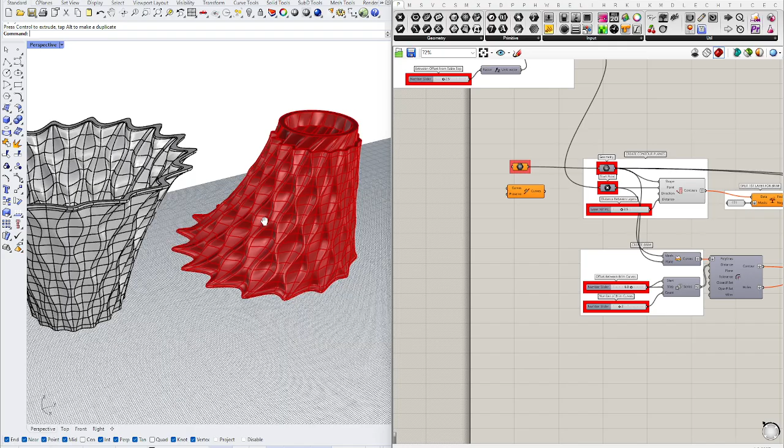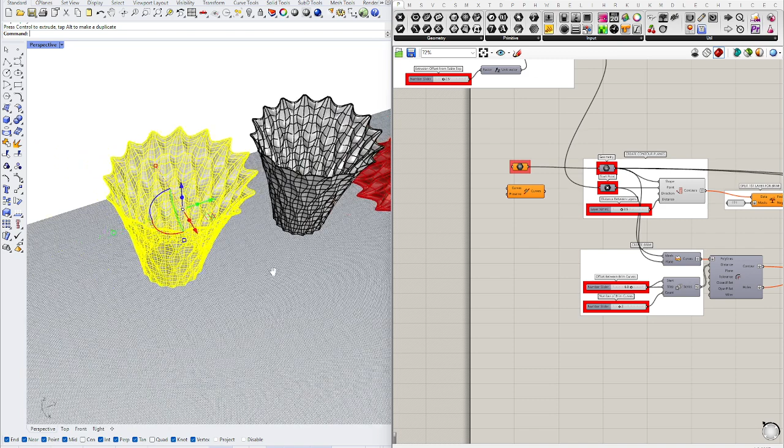So let's just start by setting up the mesh like we did before, since the file broke down just now. We remove it so that we just have one surface, and we can use write mesh to turn it into a mesh. We can go for fewer polygons most likely.

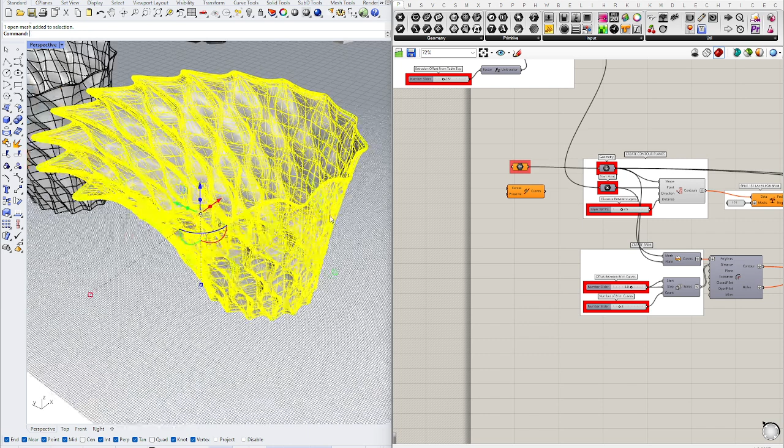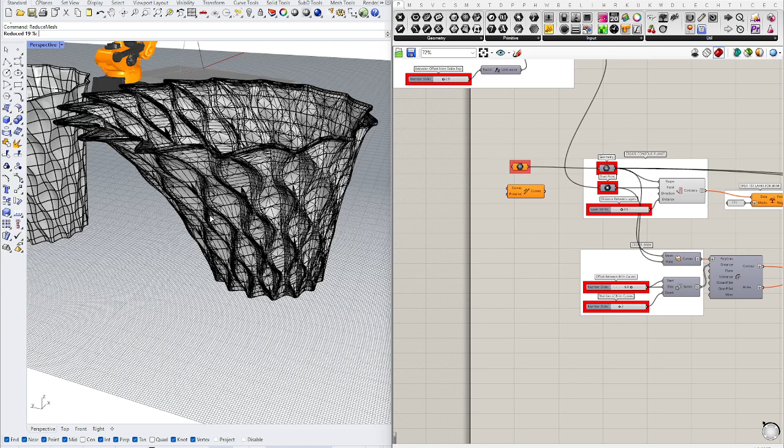And if we simplify the mesh, we have to re-simplify it, so we use reduce mesh. What we're printing now is a mesh that isn't reduced, but just by looking, I think we can go down to around 10,000 and still more or less keep all the features of the model without losing detail. It's a compromise between speed and whatnot, but in general it doesn't make that big of a difference.

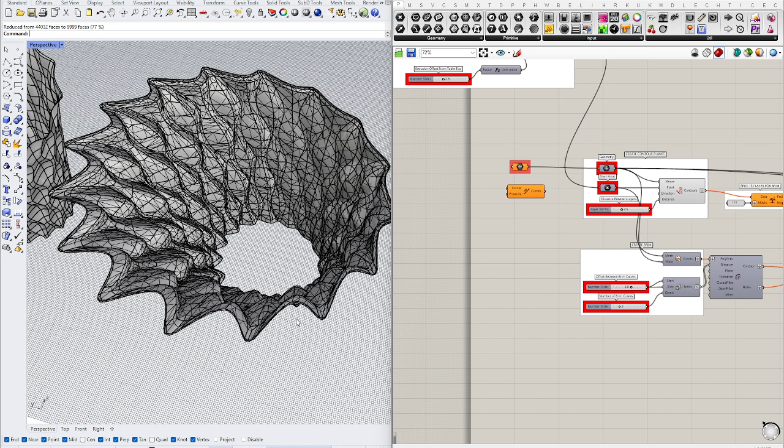It's good to reduce it just in case, and as long as it's not like millions upon millions, or maybe several hundred thousand perhaps, then it should be fine.

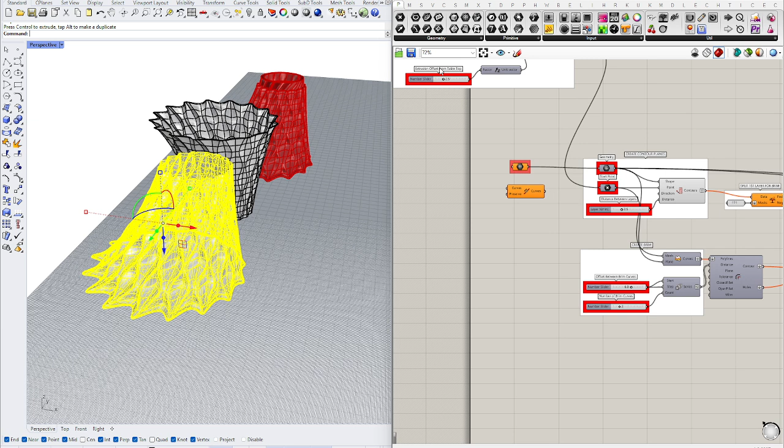We talked about this before, but obviously this one is too big. So when printing it later, we're gonna have to make it smaller or something, or divide it up. Right now I do 0.5.

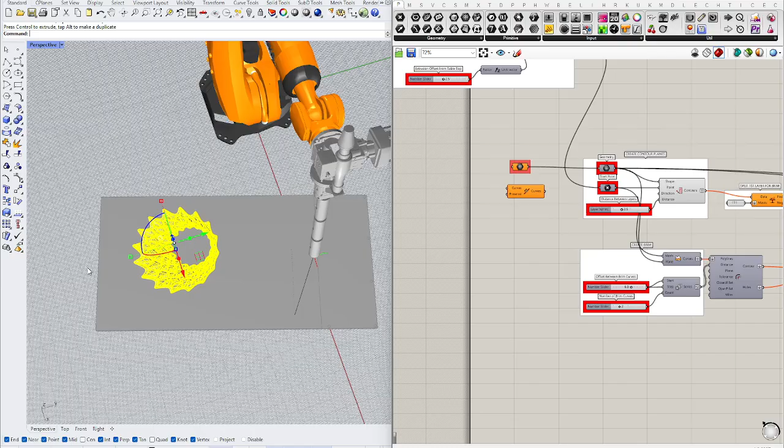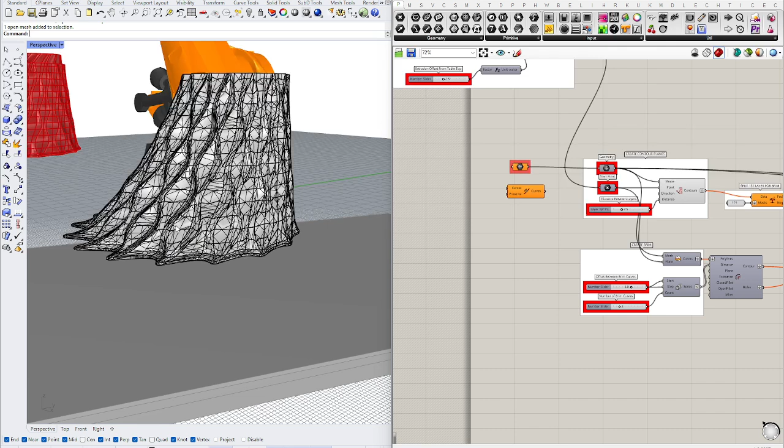And we can also consider that if we have it on the bottom, as we did now, it's a little bit easier to add more supports down here. But if we need to add supports up here, then it becomes a bit more complicated. It's still possible, but then you have to use, for instance, create surfaces up here and then use the base geometry to kind of split it or something.

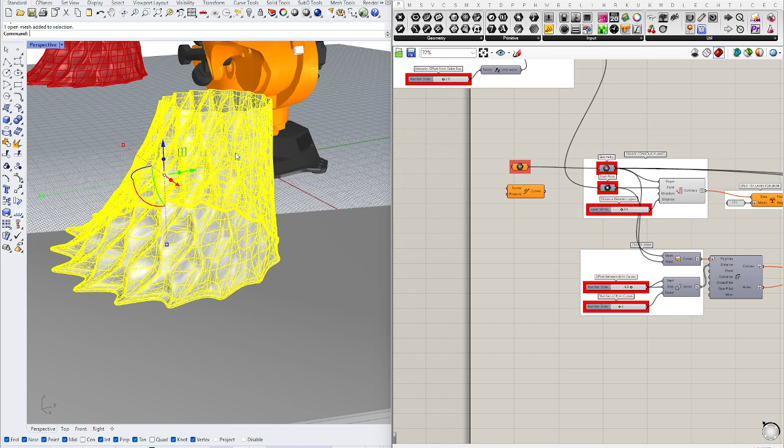It's a bit annoying. And the thing with supports in general is that if you do manual supports, you probably want to do them pretty tightly, because its ability to do overhangs is pretty bad in general. Also, if you have intersecting geometries, you're probably gonna get like a smudge line, where all the materials get compressed over.

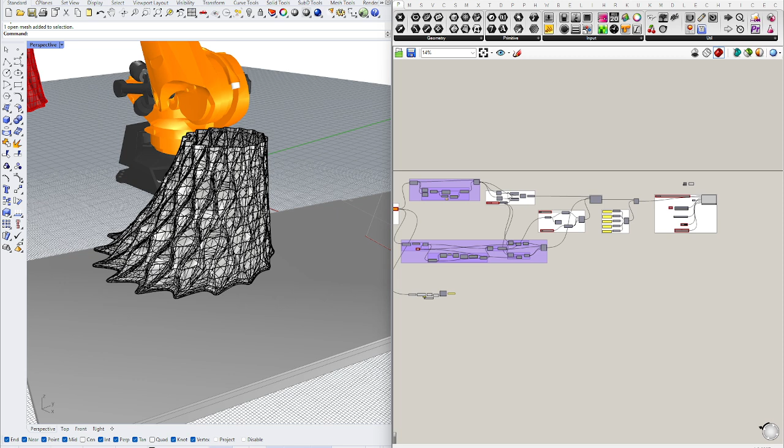Either way, once you're in here, you can open up the script. In this furthest end here of the script, you can find the printing bed, so you can bake it if you want something to be able to snap the model to.

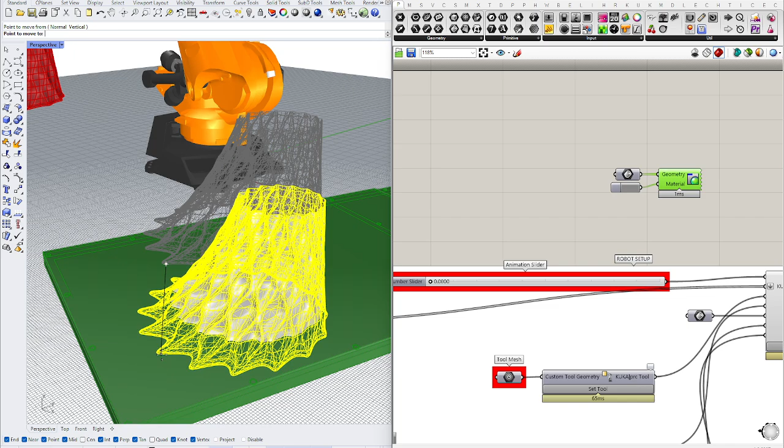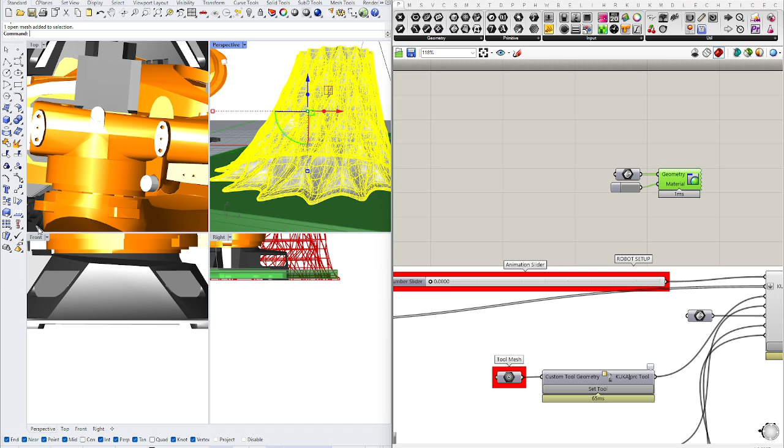So I tend to lock this, and it's usually better for the print not to be totally flat against the ground, so you can just move it up like 2 millimeters. It can be worth double checking that the model is for sure truly planar. As you can see here, since we did reduce mesh, it's a little bit jaggedy now at the bottom, and that can actually at times create issues.

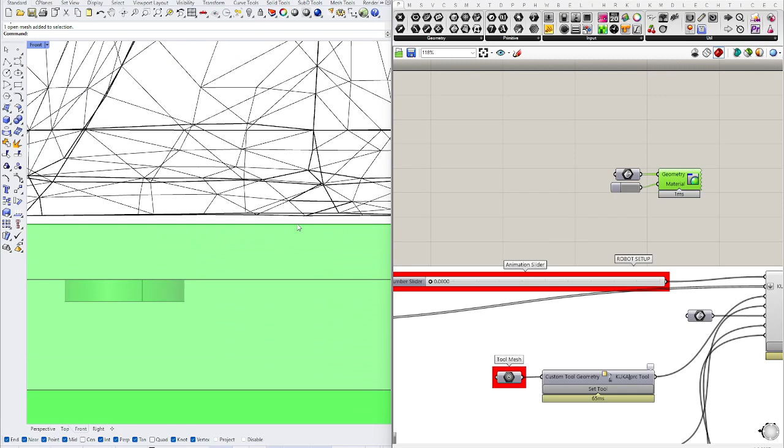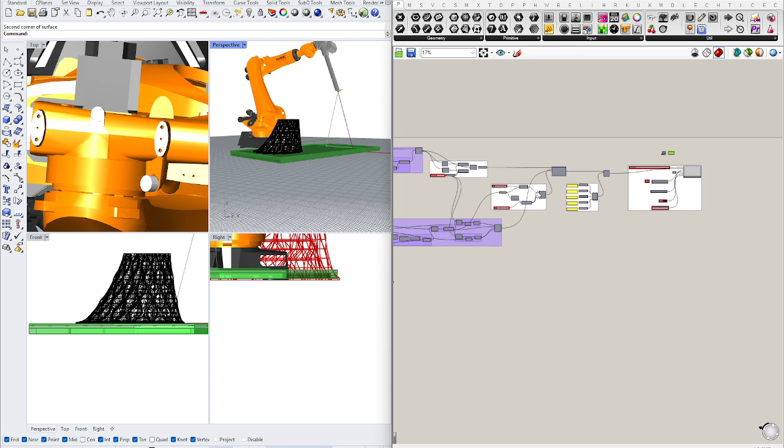An easy fix would basically be to just add a surface and maybe move it up 3 millimeters or something, and then cut it and move it down a millimeter or something. Let's just try this one and put it in.

So just basic things, it's the script. It's in Grasshopper, obviously, and the only parts that you need to really know about is how to put your mesh into the script.

So it's basically this part over here, and give it a special color if we want to, maybe like green or something. More or less everything else is automated or preset settings. There are some things that you can have a look at or we can go through, but basically that's all you need to know.

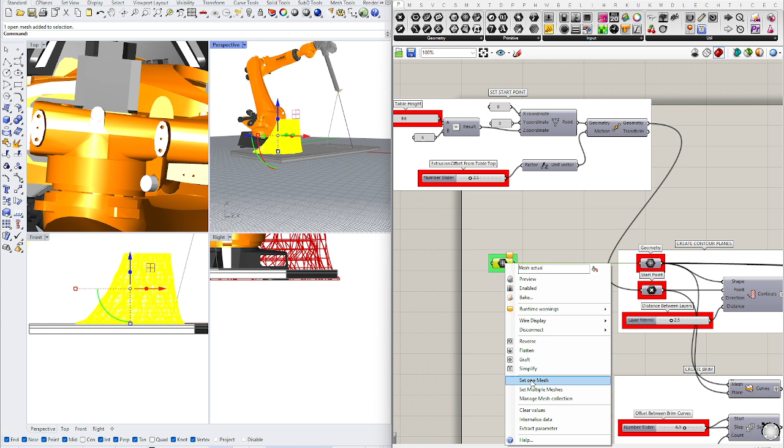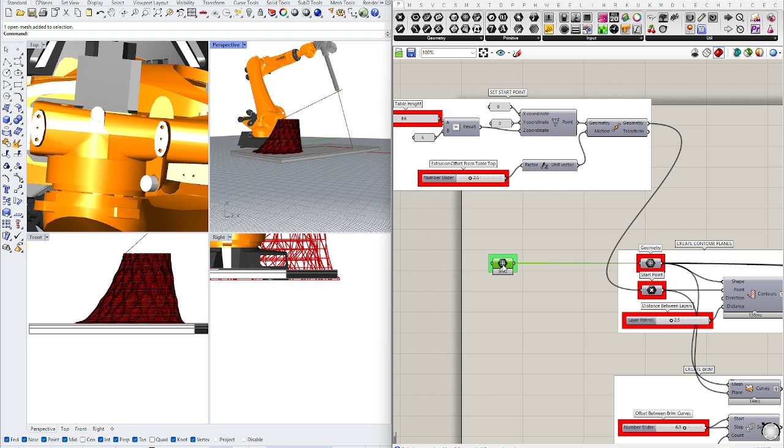So we set one mesh, and we actually made this mistake before, but you can only use one mesh. If you have multiple meshes that you want to print at the same time, you just join all the meshes together, and then we can put it in as one mesh, and everything works fine.

And if you hide this, then we can see how it's slicing. So basically we have one part back here. This is how we're setting the first layer height somewhat, so you don't need to touch that.

Here is basically the distance between the layers. You probably don't need to touch this either. I think it's fine as it is. We can play around with that at a later date. Then we also need to adjust the flow rate.

And here is the amount of brims. This one can actually be somewhat useful, so we can add more brims to the model. A brim is basically like extra lines at the bottom that just helps the 3D print get stuck, stick to the print bed. Here's the offset, and 6mm should be fine.

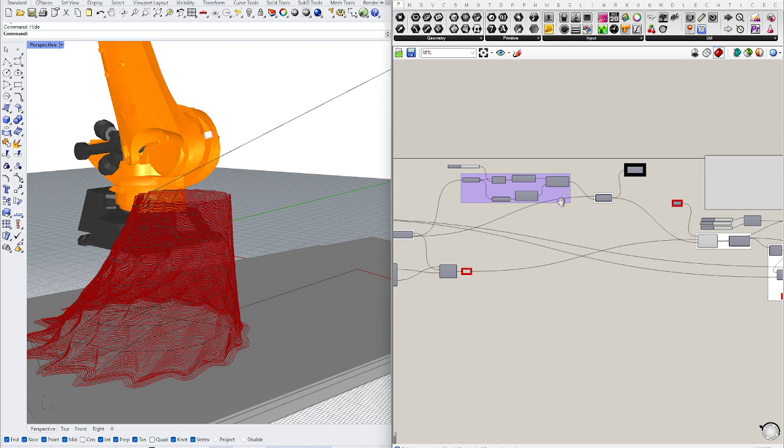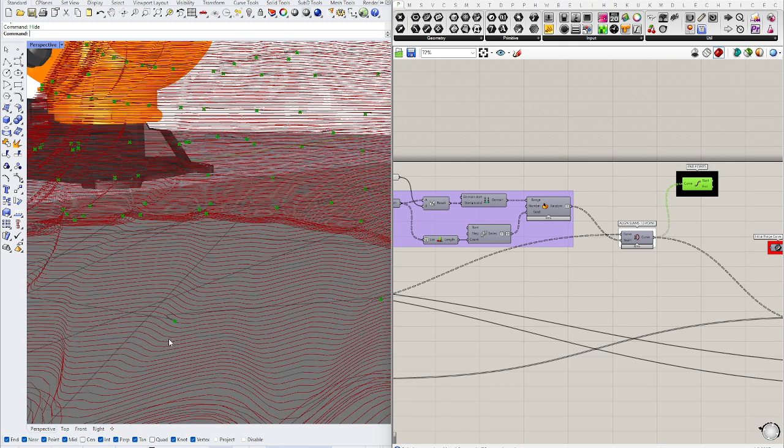Now, in general, this part over here sets where the endpoints of each print is. So basically here you can see this print ends here and then it starts over here. This specific pattern becomes very Christmas-tree-like. And we have placed all of them in different spots, mainly to remove having one seam where everything is in the same spot, because it just makes the print a lot weaker.

There are a bunch of little things to script that just help you in general, but the main things are, for instance, this part that snips the ends of the prints, or this other part that controls the feed rate. But most of that you don't really need to touch.

The only other part that is relevant is over here, where you see this PRC simulation tool, or the PRC settings. We can go into this by double clicking it, and we get this panel here.

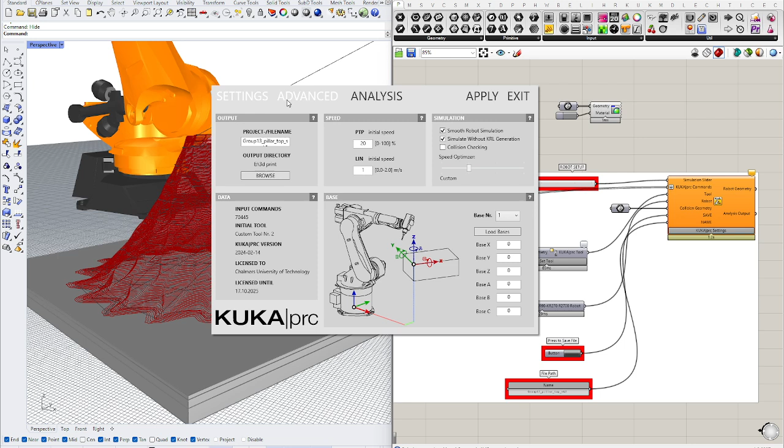Inside of it, we find a bunch of settings. You will most likely not need to change anything, but the only thing that's useful is this analyze tool. Using this, you can see where you might hit singularities, and right now we don't have a lot of them.

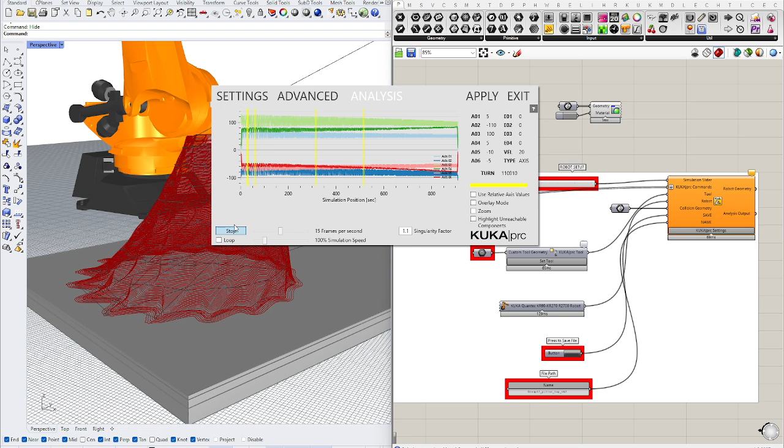We can, for instance, play this simulation as well to see how the robot arm would move. This can be quite useful. It's not always the easiest thing to just see where the lines are.

What does it mean to hit a singularity? A singularity is the end point for a robot arm's axis. It's hard to explain exactly why it's called singularity, but I think it's basically that it's coming closer and closer to the kind of maximum range of how far that axis can go.

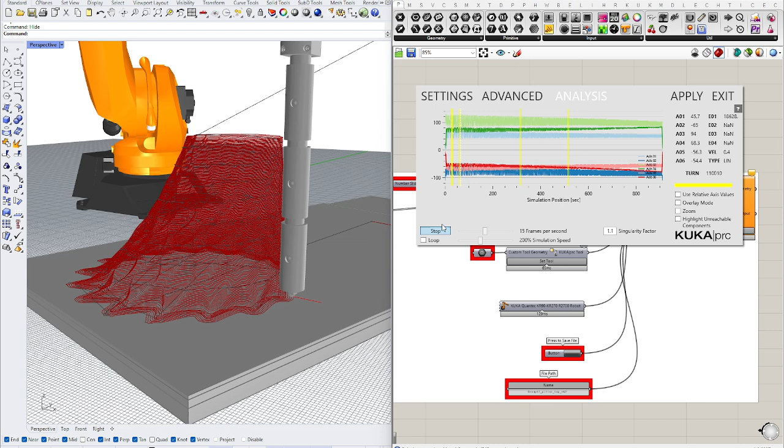I suppose singularity is referring to it getting close to the limits, basically. So if we hit a singularity, practically speaking, that would mean that the print couldn't be continued and would have to restart, which would be annoying.

The second part is this name part. Here we can change what name the print file should have. So we can call it top test.

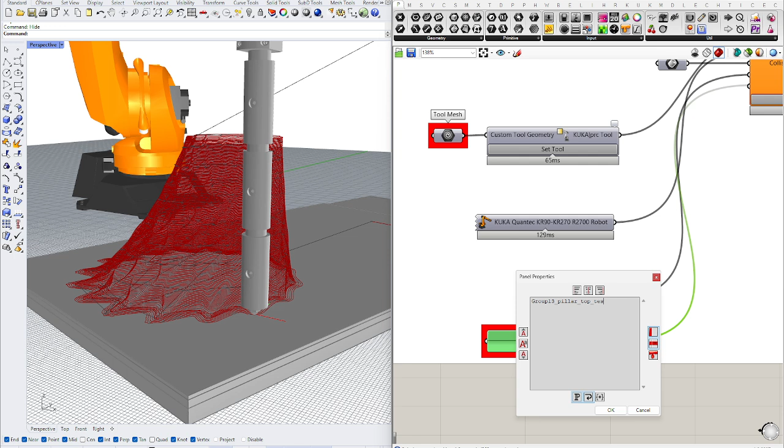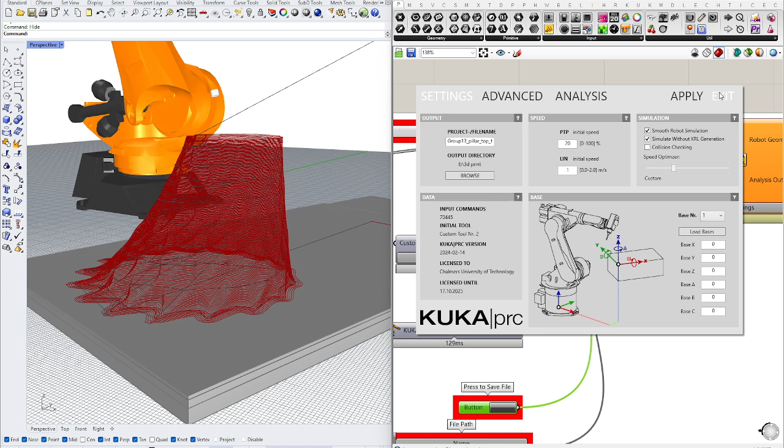This last part here is that you have to set where to print this thing, and you set it by going to output directory and then pressing browse, and then you can pick whatever you want. Don't forget that you need to press apply for anything to be applied. Once you're ready, it's just pressing this button to save it.

I think that's most of the important parts. So it's not more complicated than that. At the end of the day, we'll still have to check the file and whatnot.

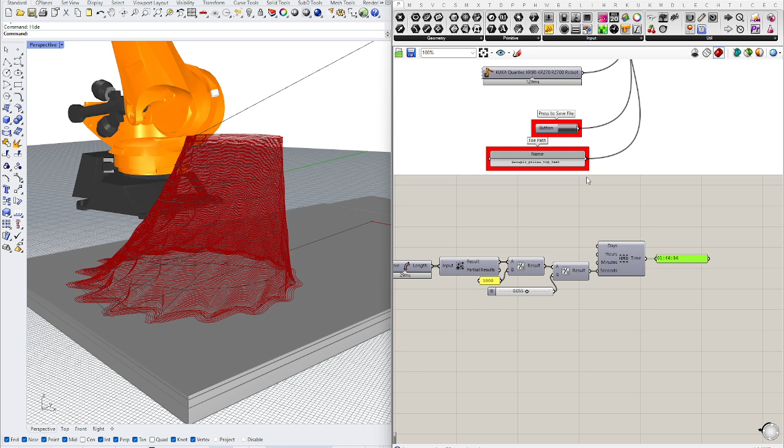There is one more part that is quite important, and that's under advanced here. To run this, you're gonna need a license. I'm gonna put up that license on Canvas so you can get access to it. Then it's just basically install license, and then you pick the file, and then it should be fine.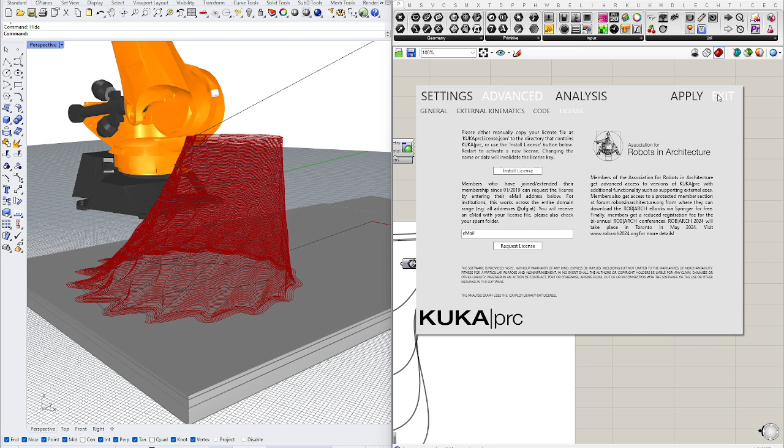It's just saving the SRC file. There's no option for other files. It just saves an SRC file. We could actually have a look at an SRC file. Let's see here if I can find one really quickly. So here, if we open up an SRC file...